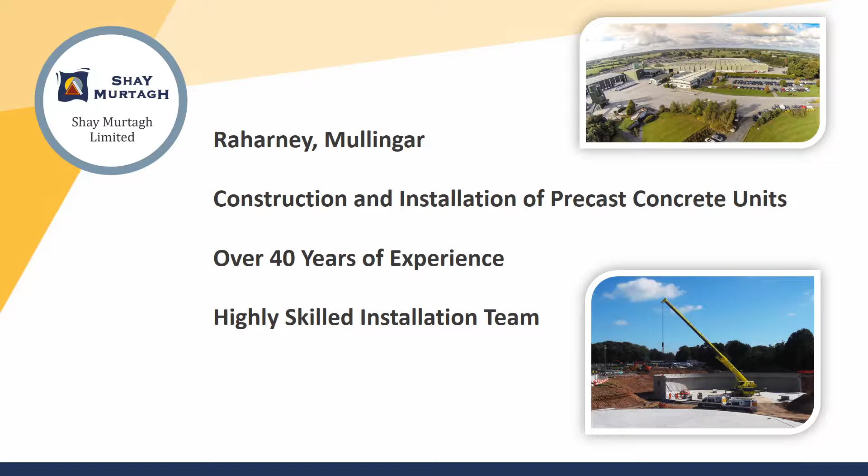These are projects we're involved in at the moment. We're doing 60 houses out in Ongar. We're doing three 5-story apartment blocks up in Blanchardstown. We just did a hospital in Cambridge. What else are we doing? We're doing a school in Galway and a nursing home somewhere in Fingal as well.

It's the biggest factory of its size in Ireland, and there's one bigger in the UK that just does that type. It only does 150 thick panels, 200 thick panels, or twin wall. So if you have a house or an apartment block or something like that, it has to be one of those three products, or we can't do it. It took us a while to learn that, actually, because the lads were trying to sell 250 thick panels or 300 thick panels, but the system just can't do it.

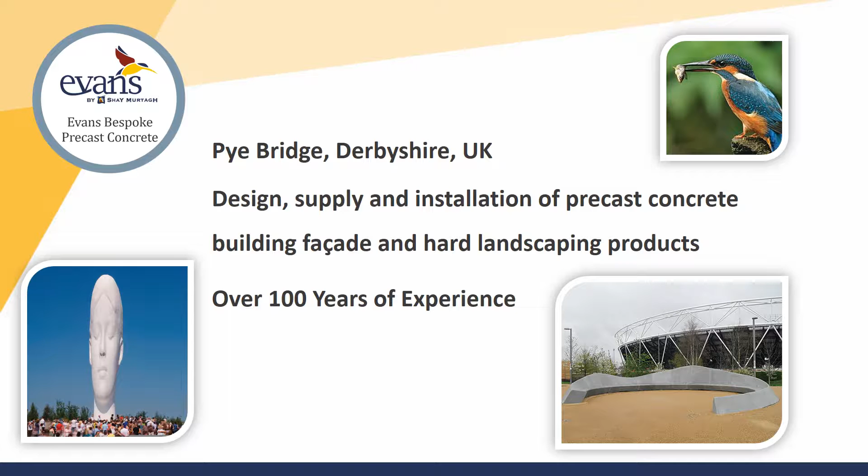Every company has a mission statement, and ours has always been a commitment to deliver infrastructure on time, and this has been key to our success over the years. How important a mission statement is - your clients measure you on it every day.

Again, vision - I wouldn't say we're visionary in anything, but I suppose we are customer focused, and we try to get everybody involved in the dialogue with the customer, and continuous business improvement, and then sort of CPD, trying to get our guys trained up and improve everybody in the organisation. We work a lot on culture.

I know in the old days the precast industry was like construction generally - maybe a bad reputation, a hard reputation. These days we work a lot on trying to develop a culture where everybody feels like it's somewhere they're delighted to go to work. We do this through a load of different ways of supporting local organisations, dinners out, social events, all that sort of thing. It's not like Google, but it's trying to be a bit like Google. We work a lot on our values, so there's no more screaming or anything like that we used to see on construction sites years ago.

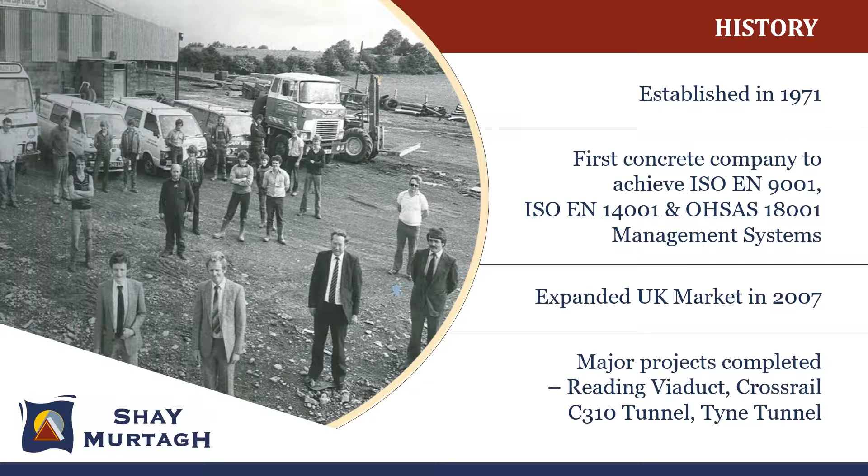What I didn't realise at the time was nobody else could do it, and nobody else would have been in front of the truck trying to make sure it was going to be there on a Sunday morning.

The rest of the products - people in the industry know Shay Murtagh for bridge beams, for culverts, for tanks. I suppose they don't know us for twin wall, residential, or commercial.

We also have a reinforced soil business, which is Hexlock and Gridlock, and then sort of hard landscape and public art. Shay Murtagh is not really a name that's synonymous with public art in the past, but we can do that these days.

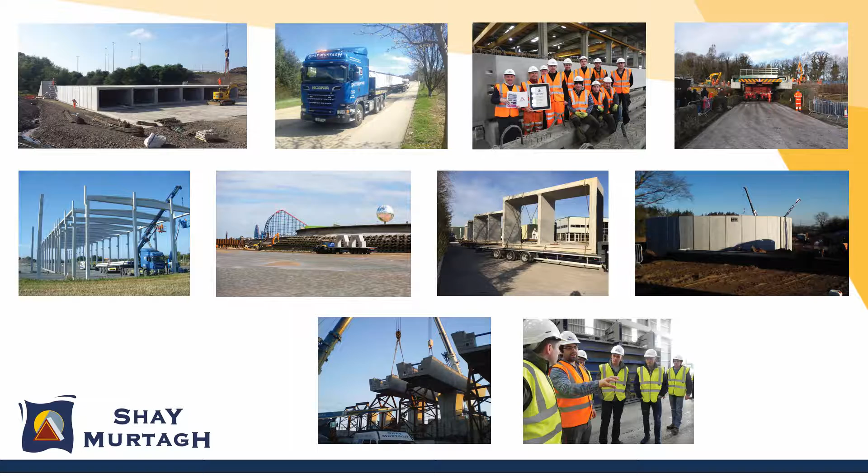In the market, I suppose, from 2007 onwards, the precast market just crashed here, so we found ourselves having to depend more on the UK. Today, about 82% of our production, of our sales, is in sterling, and I have a list of clients there, our major clients.

Though everything we make is bespoke, you tend to find it's the same people sort of reordering all the time. So if you have a relationship with a particular guy in Bam Nuttall in 2008, well, it turns out he's probably running a whole scheme of projects these days. Same with any of the clients really - those guys move up very quickly in the UK through the ranks, so they become key customers these days.

Just in terms of capabilities - we talked about design, obviously manufacturing, the factories, logistics and installation, and that's the whole process for precast. For whatever precast you need, you have to get the precaster involved in design, and he has to make it, but nobody buys precast ex works, so you have to do the logistics. The precaster has to do the logistics and often has to do the installation.

Just on design - I think 75% of our stuff is drawn now in 3D in Tekla. We use Tekla, we tried Revit, we didn't find that very comfortable or compatible with what we were doing. Our clients now send in an IFC file, we'll change it into our model, we try and convince them to use a Tekla model, but if they don't, we transfer it back.

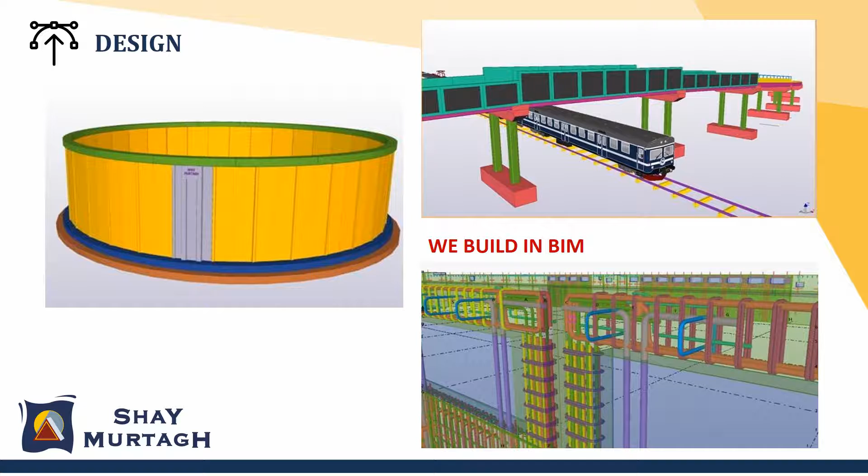This whole 3D design has made life so much easier for the guys in the factory, for the guys in installation, and obviously for the design itself, when we can see the clashes and the issues, and just pick slimmer sections or a new idea. We'd often just throw a model up on the wall and decide to take it apart to see what we can do to make it lighter because of the piling or something like that. And often the type of precast you choose will affect lots of things around the whole project, not just the precast itself.

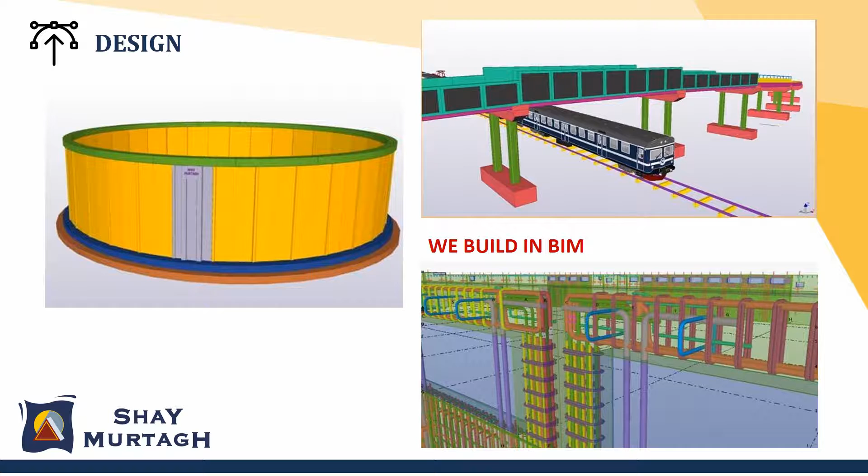All sorts of beams - the heaviest piece we've ever made is 200 tons, and we go back to small stuff, 1 ton. We do all types of U-beams and bridge beams, but what people again don't know us for is last year we did 15 steel bridges, because often steel bridges have as much concrete as a concrete bridge, would you believe?

That's where we need a particularly thin section, where the client for some reason cannot accept a deeper section. So we have to go with a steel composite deck, which often happens when you're doing retrofit or replacement bridges - you have to look at whatever solution you can use as engineers.

For the solution - in terms of bridge replacements, last year we did 67 bridge replacements on Network Rail in the UK, and about 12 for Irish Rail. So it's quite a good part of the business - every week and a half we've got 2 bridges going out. Each one of those is really challenging and interesting from a manufacturing point of view, a design point of view, and then the whole logistics side too.

Christmas Day is the busiest day of the year for the logistics team, but like 2 weeks before is the busiest for the factories, because in the UK the rail lines close down at Christmas. So the busiest we've had is 12 bridges on Christmas Day - that's 172 trailers moving on Christmas Day. It was mental.

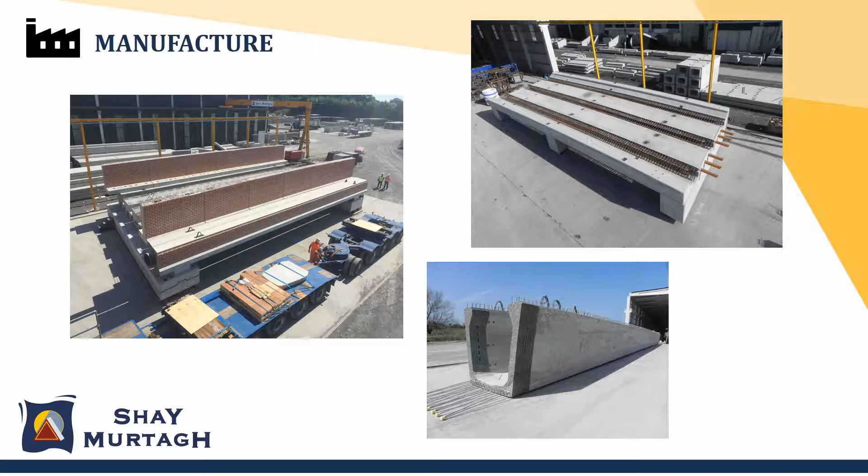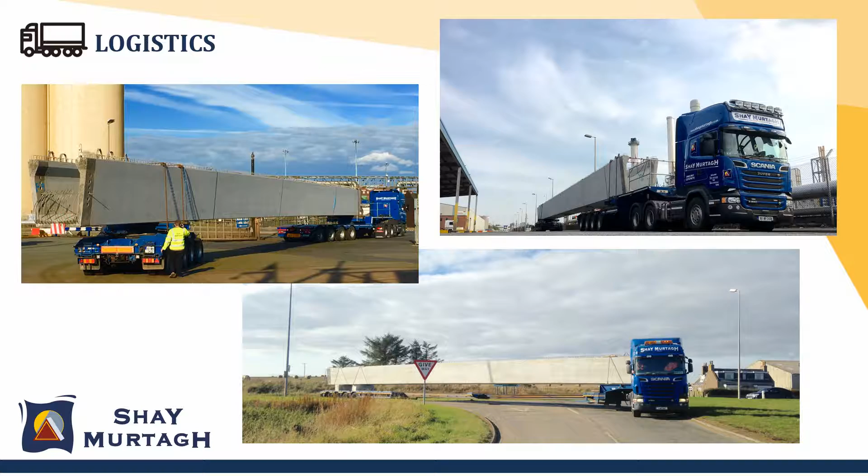So that brings us on to logistics. We've about 120 odd trailers, everything from standard 40-foot trailers right through to the modular stuff that you would only see on the road at night. Things like this - a 45-metre long beam, W19, going up the M6.

In the UK we go up during the day, but in Ireland they have to travel at night. So if you're on the M4 at night, you'll see a load of Shay trucks crawling up the road pretty slow. We deliver - that one's going to the Mersey Gateway bridge.

There's 256 beams on the Mersey Gateway, and they're all longer than 38 metres. So it's a real logistical challenge as well as the manufacture.

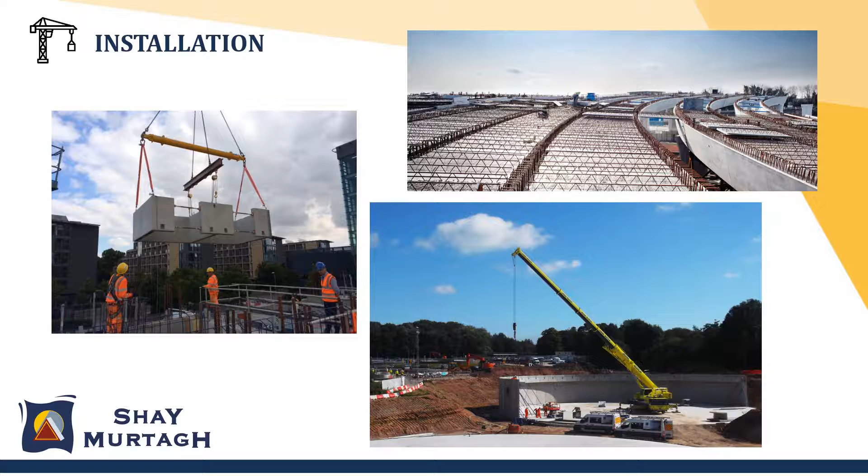The next bit was just on installation, and what you see here on the left-hand side is a stair core and a lift shaft. We do precast stair cores and lift shafts, and they go in all over the UK.

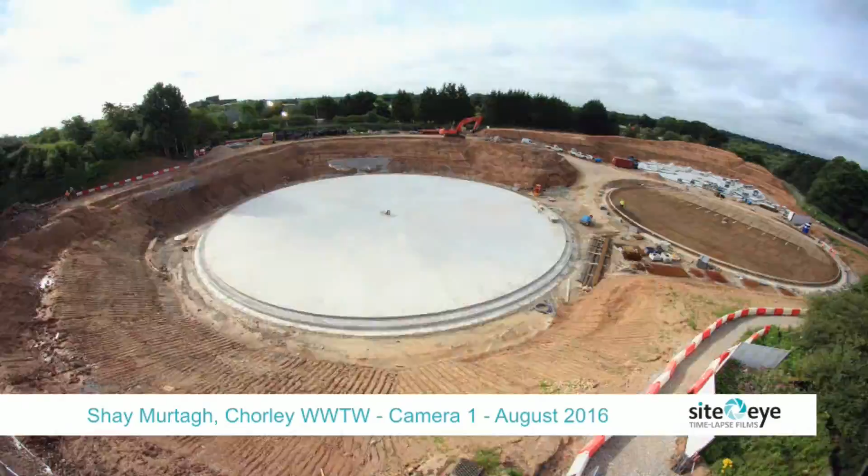I suppose what the installation team's working a lot on is the concrete tanks. Concrete tanks are precast post-tensioned tanks. I actually did my thesis on it - it's in the library still, I must look it up to see if it's still there.

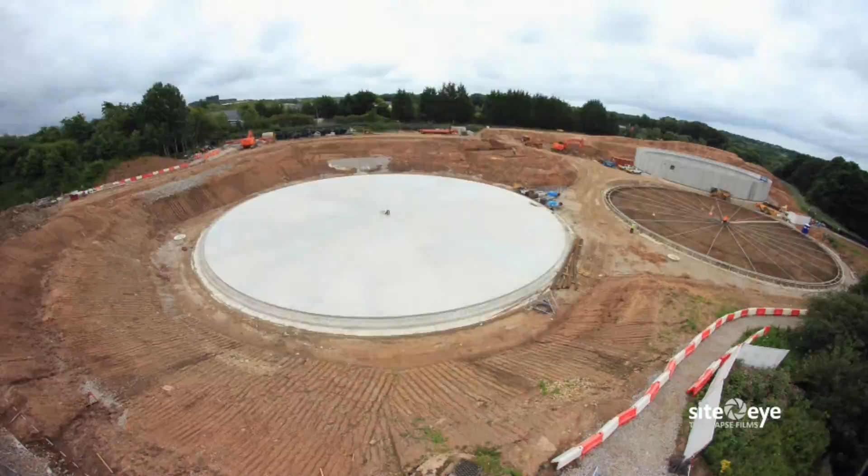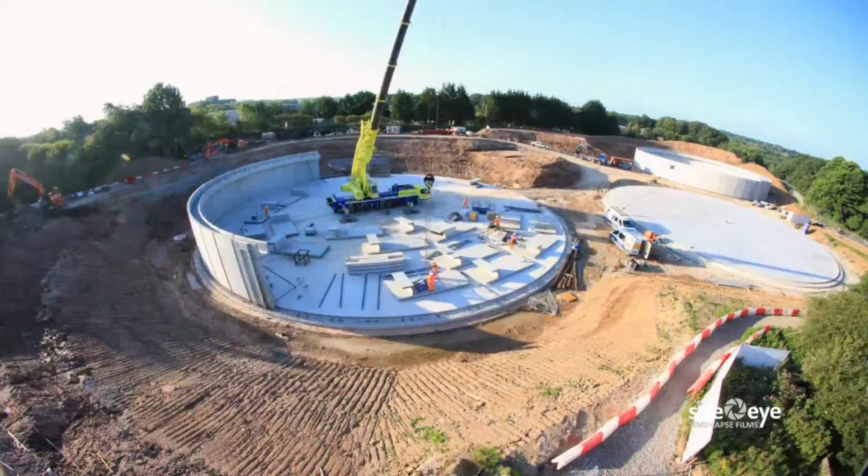We've been doing precast post-tension tanks in Ireland for 40 years, but they're really only catching on in the UK lately. In the UK there were a lot of issues around post-tension back in the 70s, so it hasn't been that popular - it's taken quite a while to get them to understand the system and what we do.

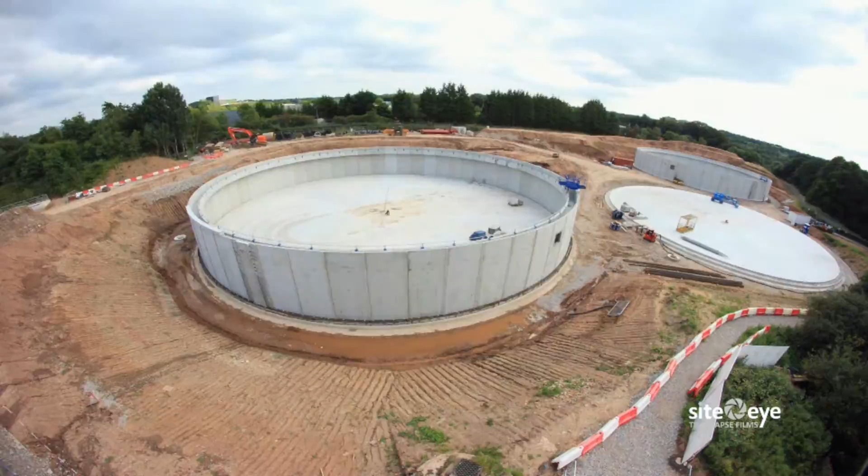The tank panels are much bigger these days than they were back in the 70s. Now they're put up by big cranes, and they can be erected in 2 or 3 days. Typically a team of - on this project - there's 5 guys working on site, and they have 3 tanks up in 3 weeks, and the client is wondering why he hasn't used this his whole life. So I think it's just another part of what we do.

There's a little bit, in the post-tensioning - I wouldn't say black box technology, but there's a bit of thinking around the post-tension design in those circular tanks. Steve knows a good bit about it, but we're also doing some rectangular post-tension tanks at the moment, and they're really interesting as well. We've been talking about this for about 10 years, so we finally have the first ones going up now.

In terms of operations, when you're running at the sort of production levels we do, supply chain is really important. You'll obviously have your concrete and steel, but all the accessories, connections, everything required - you need to have your supply chain on hand. So we work a lot with our suppliers to make sure everything's available.

We've huge stocks of things like lifters and so on. We have an ERP system - enterprise resource planning - that tells you exactly what's going on. Really important in a multi-factory environment where you're trying to coordinate pieces from each factory, and design, and when design's going to come through. We call it Jarvis, and we're continually updating it.

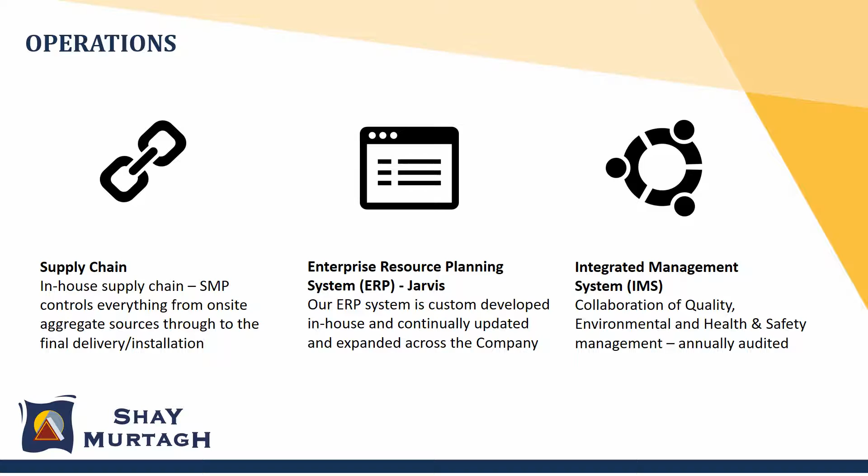Quality, environmental and health and safety. For CE marking, we're fully compliant. There's a list of 9 categories where concrete products have to be CE marked these days. So every manufacturer has to be able to do the CE mark, and it's quite stringent testing in place, and compliance with them is quite onerous.

In terms of training and health and safety, we currently have an apprenticeship program running at Loan Training Centre, where we have 14 guys being trained to be precasters at the moment. It's a bit of an unusual step, but we need people with certain skills, and they're probably not coming in off the street anymore. So we've a 7-month program at Loan Training Centre. This is the first year of it, and it's a way of trying to encourage people to come in and look for jobs, then train them up to work for ourselves, or they could get work with any precast factory, I suppose.

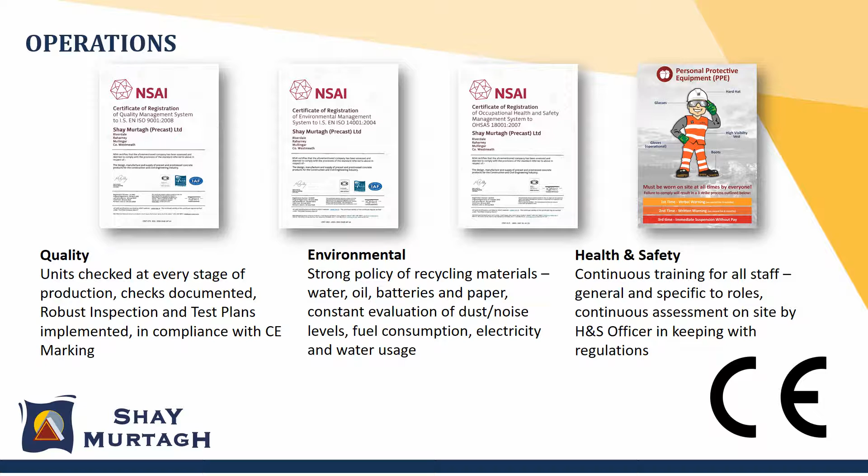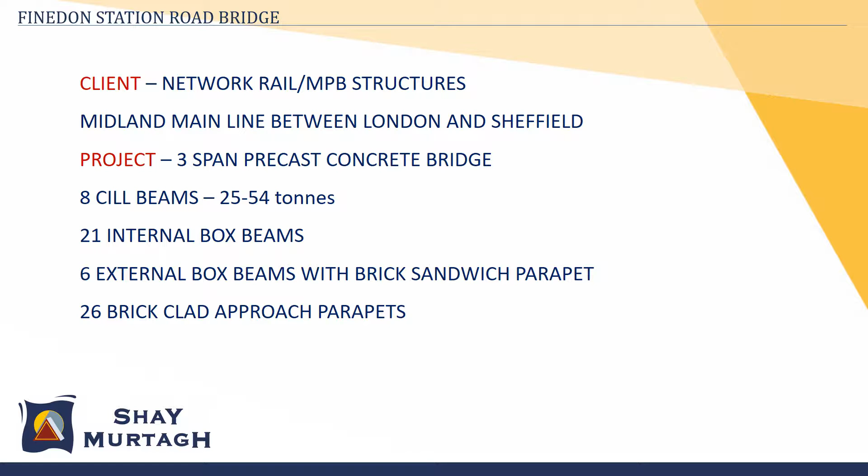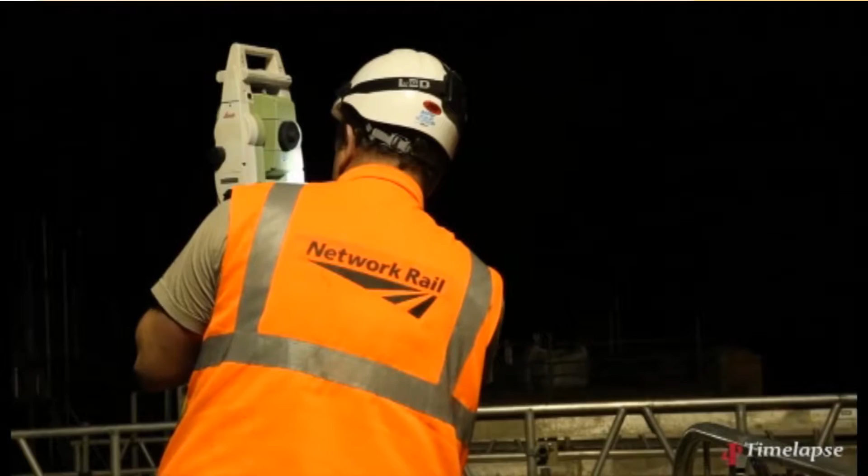So some of the projects that we do then, as I said to you, Network Rail are a key client, and this one here is typical of what we do. Sorry about the music. It's box beams sitting on top of cill beams.

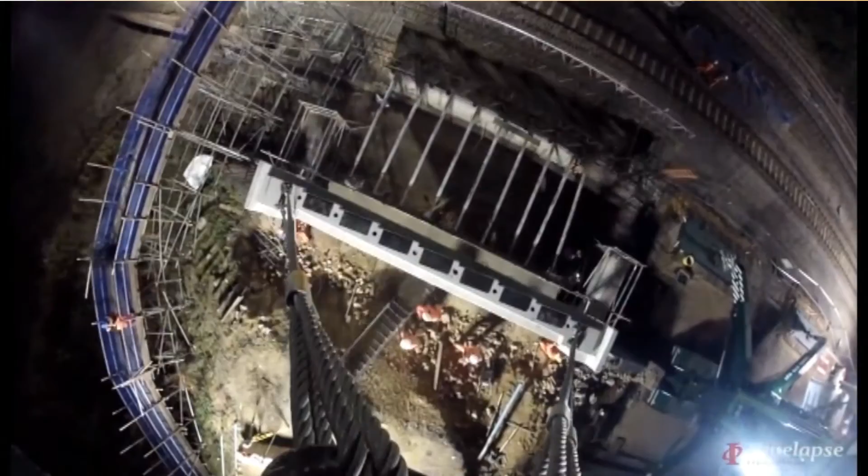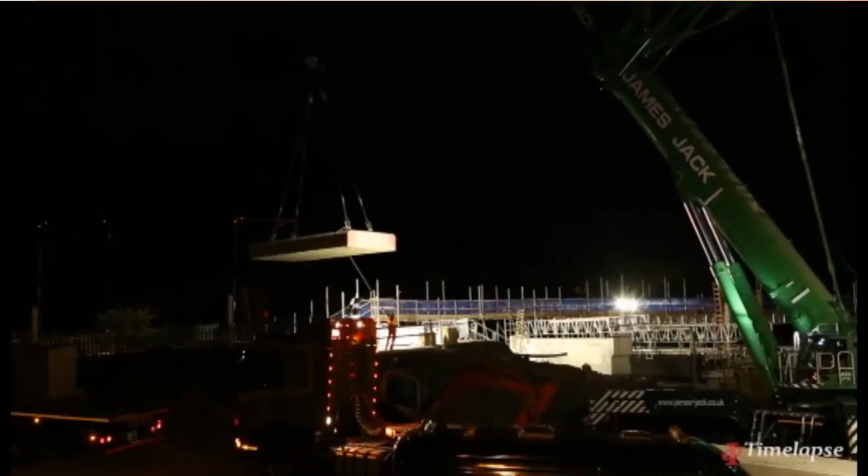So the bridge had been demolished the previous week, and there's a 72-hour possession to install the new bridge. So what happens is the drawings arrive in with us, and we start manufacturing it. We assemble the whole thing in the factory. Once it's complete, the client comes over to take a look, and once they sign off and everything, it's all loaded onto trucks and goes to site to be installed.

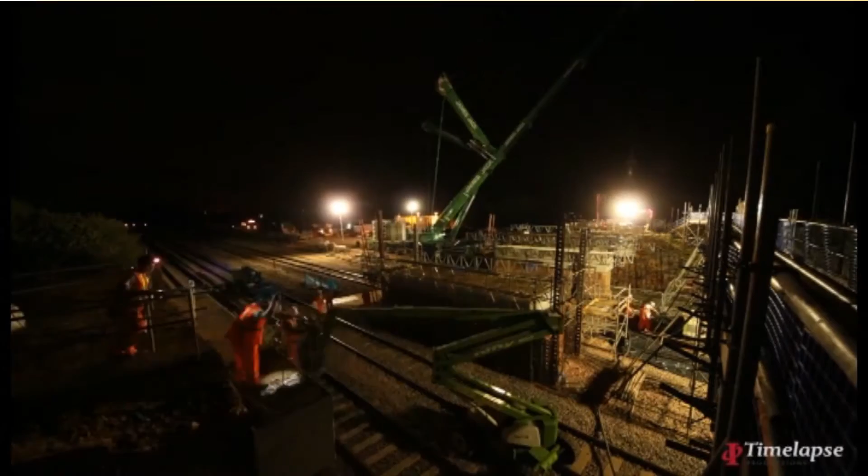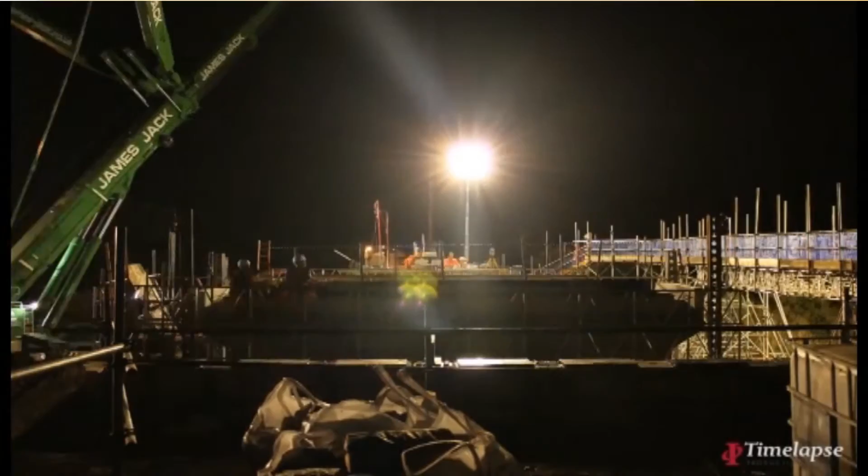So although the guys are putting it together here, they know that it already fits. All they have to do is make sure they put the first piece in the right place, which sometimes they don't, but we don't actually get too many calls, and our guys usually don't have to go to site. We take a video of the whole lot going together, give them the timings, and tell them how long it's going to take.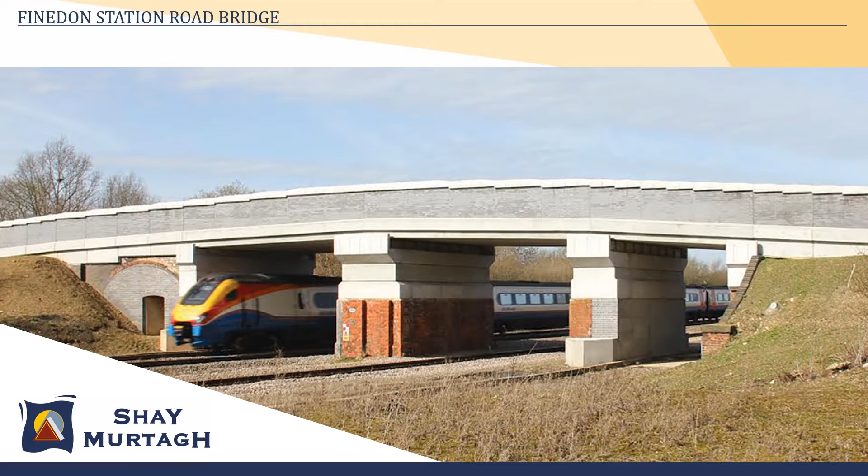And another project that just got some local awards from the local council and stuff. Probably doesn't look too bad.

The next project is the Crossrail tunnel. Crossrail was the biggest project in Europe for a couple of years there. So we got the contract to manufacture the tunnel segments for what we would say is the most difficult part of the project. It was a bit underneath the Thames, and definitely the most challenging from a geological point of view.

27,280 pieces, and very, very challenging. 36% GGBS in the mix, 30 kgs of steel fibres, there's no conventional rebar, just 30 kgs of steel fibres. The tolerance on each piece was 0.5 millimetre. So I'll give you an example of how that affects you. When we came back after Christmas, the place was cold and the heating hadn't been on, so the moulds were out of spec. So we had to wait 3 days to heat up the moulds to get them back into spec so we could start casting.

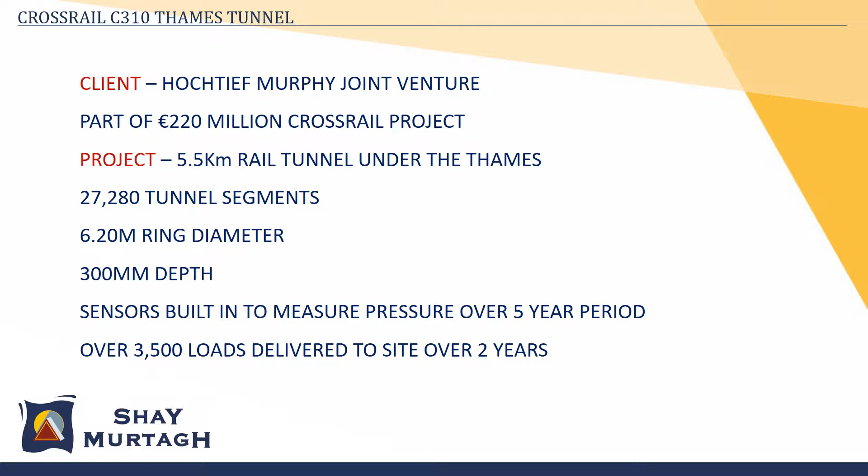Definitely a very, very challenging project. The project went faster than normal. Usually tunnel projects have huge delays. This one actually went faster, so we had to double cast. So now we've got a very onerous client with 36% GGBS, no conventional reinforcement, and we need to cast twice a day to try and make the program. And we actually did it, which shocked most of us.

Yeah, so it's a very, very interesting project. You could talk about it for 2 hours on its own without anything else. Just the testing, the fire test on the concrete, was the first time it had ever been used, 1100 degrees for 45 minutes, just to make sure it's not going to fail. As I say, you could do a PhD on the tunnel itself.

Structure 17 on the M50 is the one with the curvy bridge, right? There's 38 curved beams, post-tensioned. Again, just in Ireland with the post-tensioning situation, it was the first time in quite a while that post-tensioning had been used in this type of structure.

So we had some pretty rigorous requirements from the client around proving that the grouting was up to spec. Of course, the grouting technology has moved on so much in the 20 years since the last one was done.

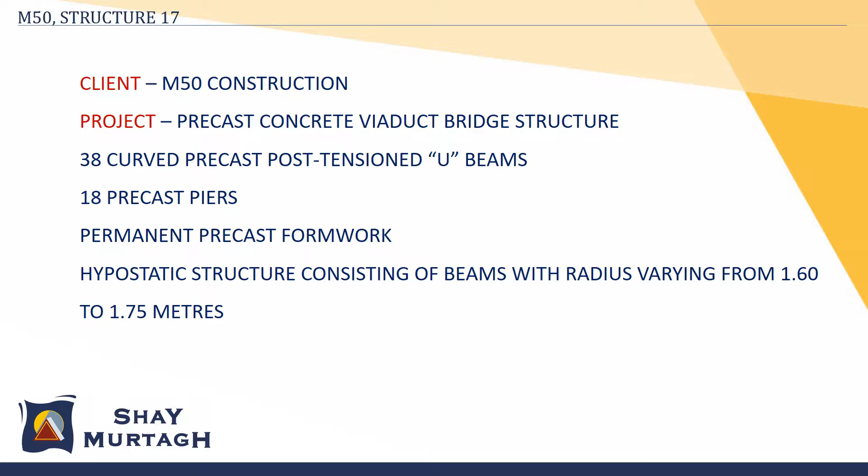And of course, when the installation sequence came out, everybody was like, oh no, because we had that last beam that had to fit in between everything else. You were hoping it was going to fit, but it actually did, and it looks quite well anyway. We've won a couple of awards on this, and High Speed 2 will be using this project for this type of design for some of the projects in the UK.

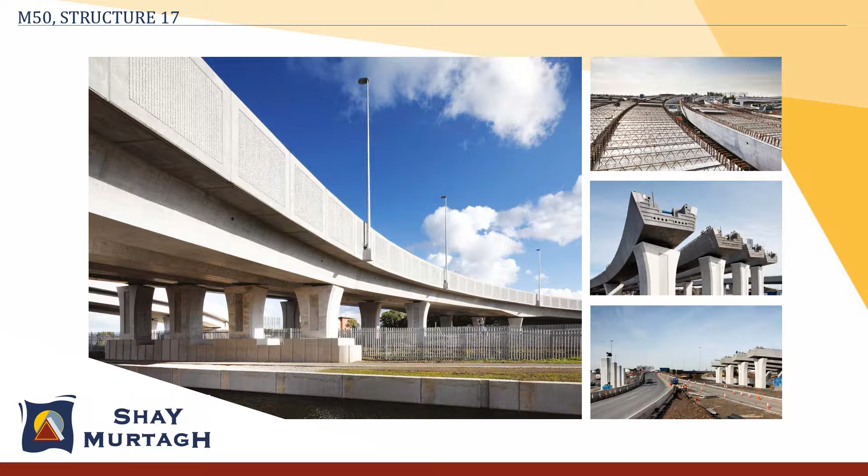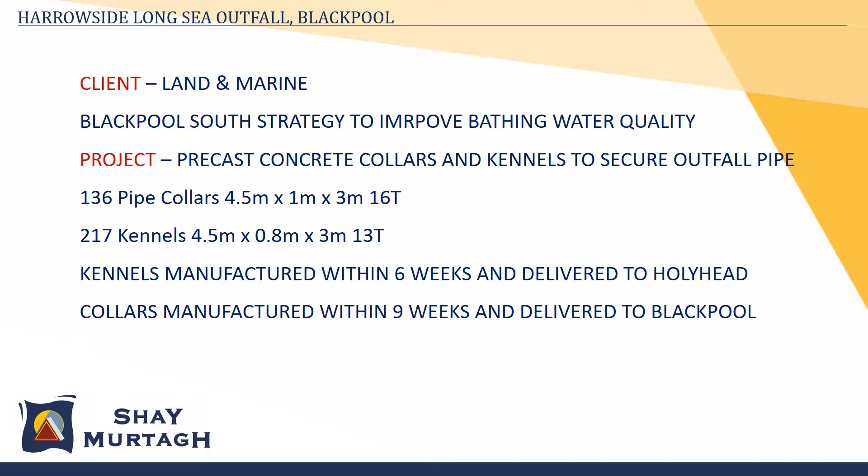Interesting way they're doing it: they put together the pipe in Holyhead, sealed it up, put on some collars, some weights on top, brought it over to Blackpool, and then basically burst the pipe, let it fall, sink down, and then put the rest of the collars on. So for us it's a huge amount of these weights, and we have another one at the moment with, I think, 1,200 pieces that are 27 tons each, just pipe weights.

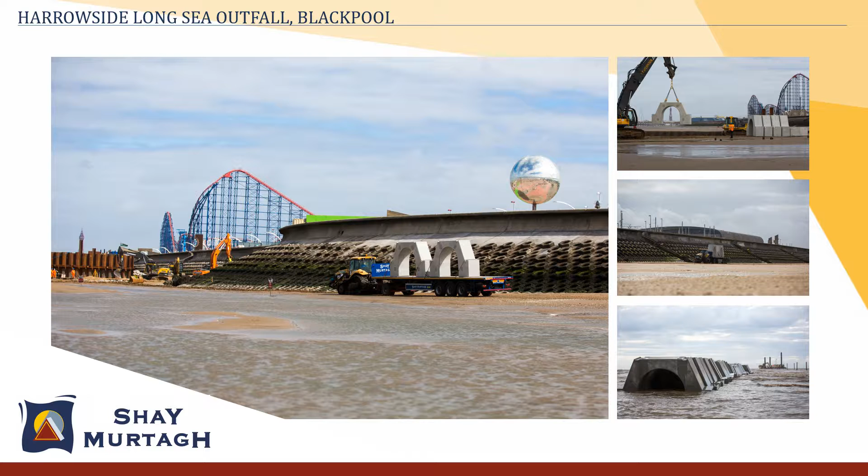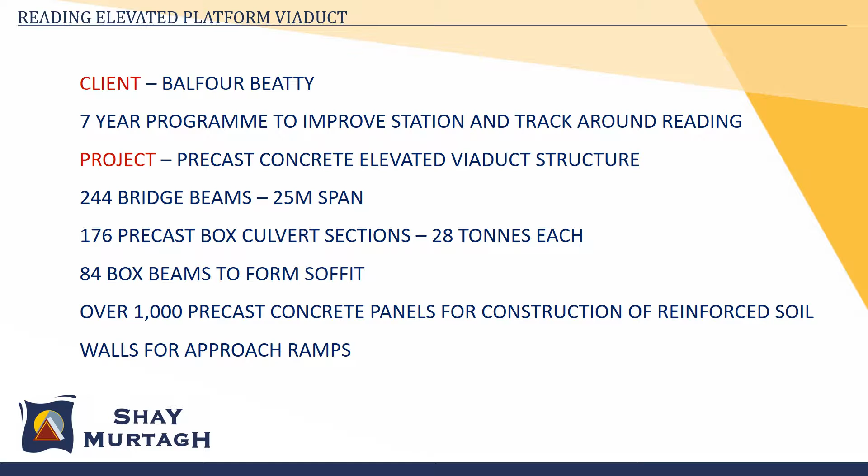Amazing, just the scale of the projects that they do. Reading, Kieran spoke about Reading Viaduct. The Reading Area Improvement project was a massive one for us, but we got the Concrete Society Award in the UK for it because of the scale of the project.

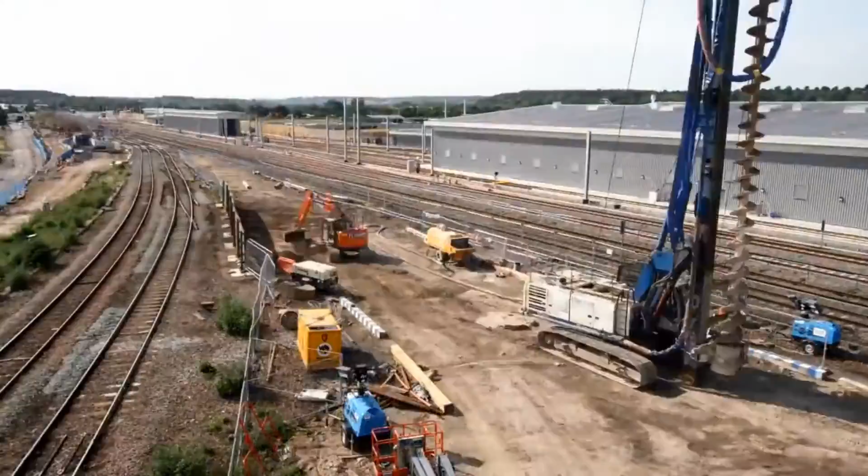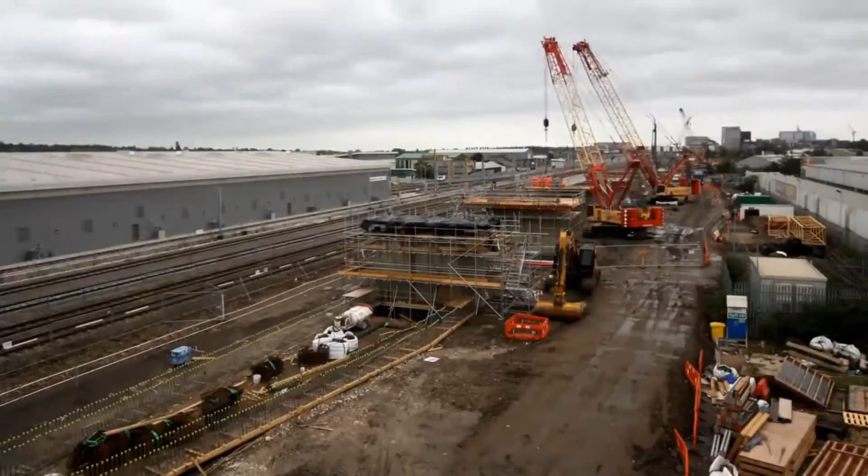There were 25 spans, 25 metres long each. Altogether there were over 500 bridge beams brought in right into the middle of Reading, and 178 culverts, 28 tonnes each, on the project. They're trying to build this viaduct in between two rail lines, with all the complications with the jibs of the cranes and everything.

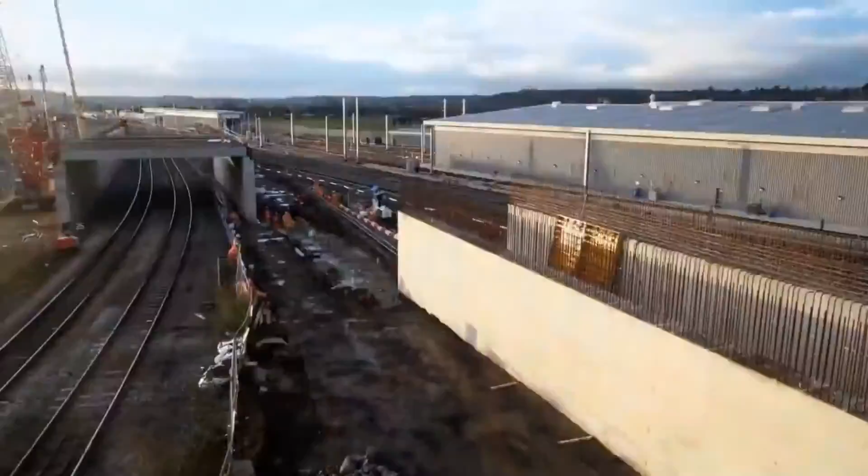The police told us that they want all the deliveries in hours of daylight. So the first day we went in with 5 trucks, 25 metres long, and they said no more deliveries during the day, they want them at night now. But that's just typical of what they try to do in the UK construction sector. No matter how complicated it is, they seem to put their mind to it and try to deliver it.

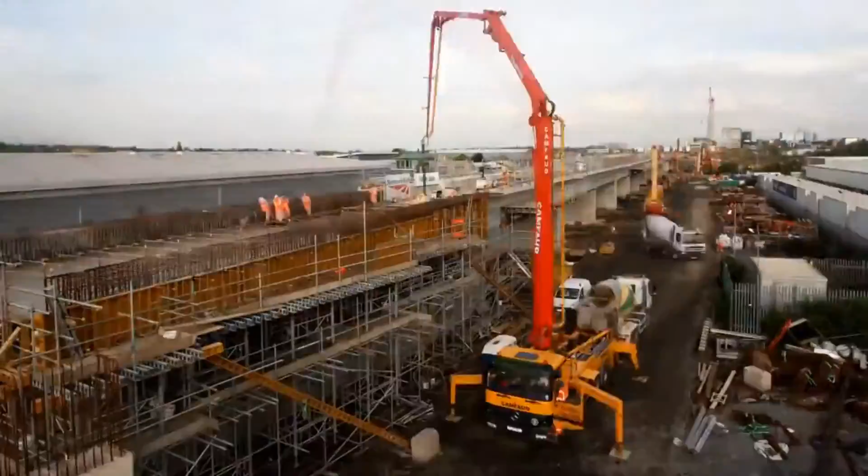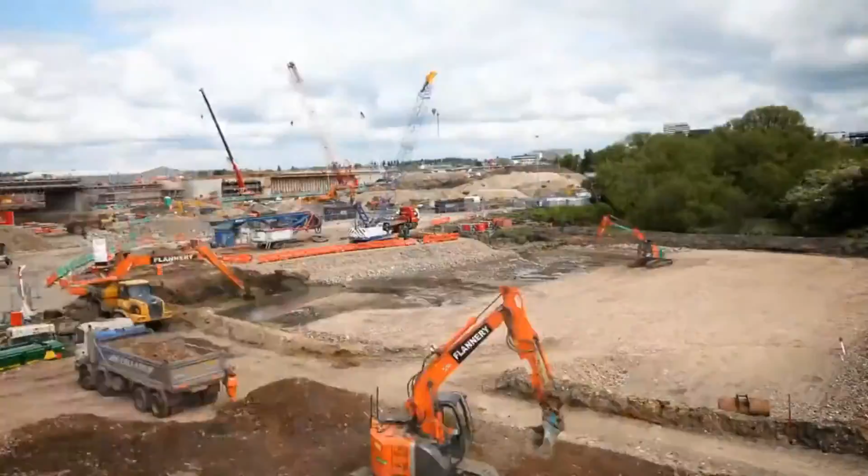There's a great shot here of the installation of the culverts, where they've got a 1,200-ton crawler crane. I hadn't even seen something like it before, and they're just putting in a couple of culverts every day. It's just slightly different thinking than the way we would probably do it ourselves.

This construction site is right in the middle of Reading, on the Great Western Rail line, from London to Cardiff to Bristol, so it's really busy with train traffic.

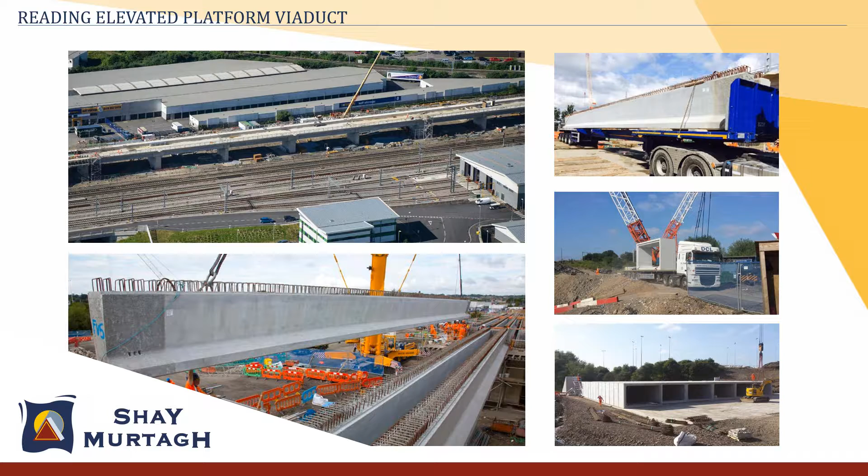Today, if you go to Reading, it looks really well. It does look new, it doesn't look old. I'm not sure why this one is in here, but anyway, the little outfall - I think the lady in marketing who did this liked the project or something.

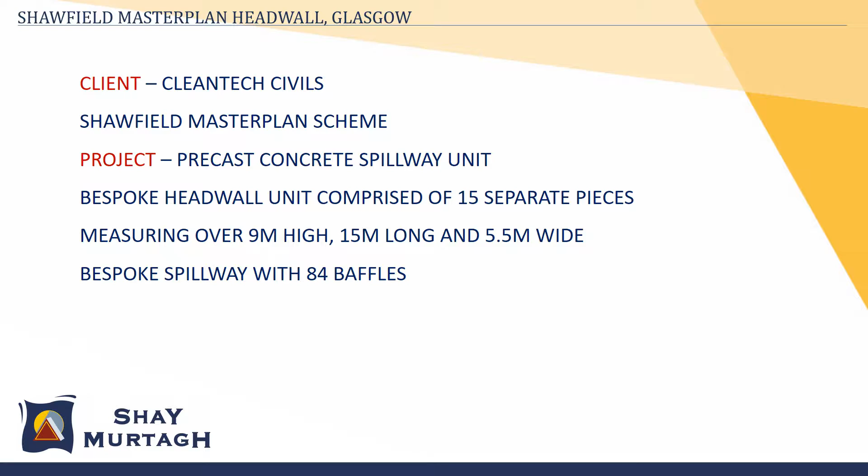Again, up in Glasgow, the people of Glasgow thought this was a great job for the Environment Agency up there, but the rest of us are going, it was a nightmare. More of this sort of architectural concrete, I suppose.

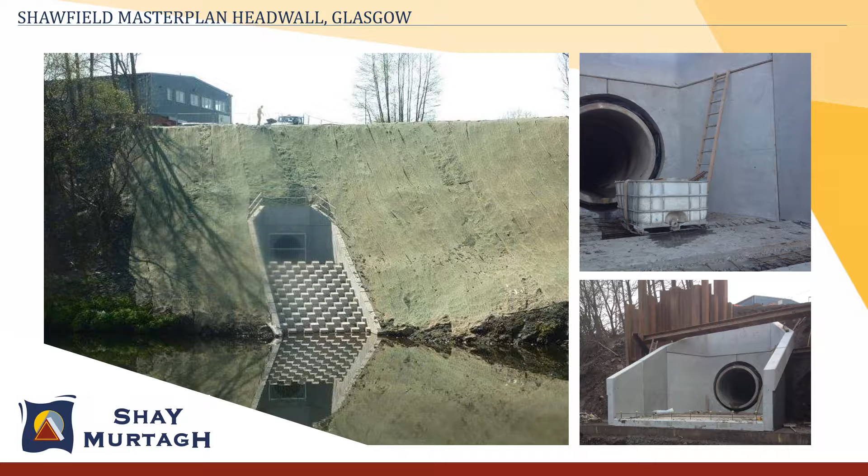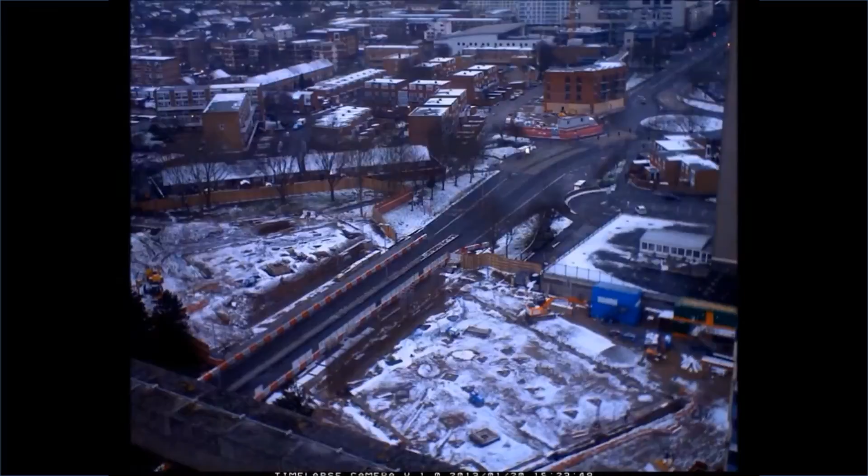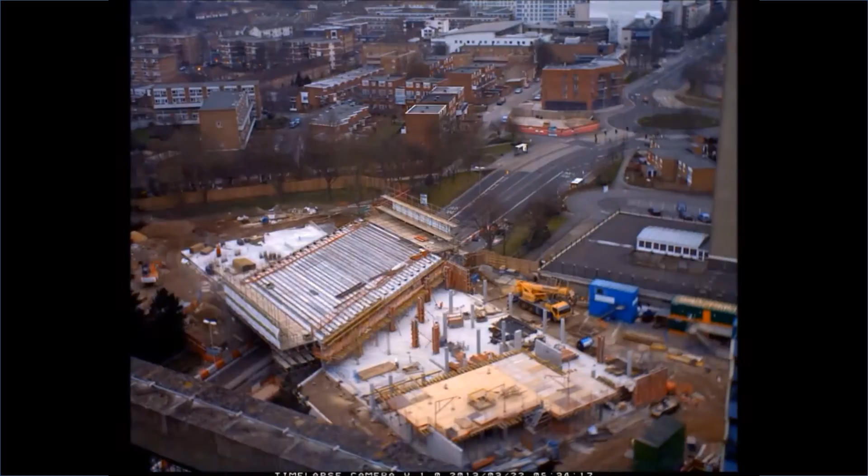Essentially what happened was there were two tower blocks, blocks of flats, that were divided by a dual carriageway back in the 60s, and in the 70s the place got a bit run down, and they started to shoot at each other from one block to the other. So to try and rejoin the community, they decided to build a bridge and then put this community centre over it.

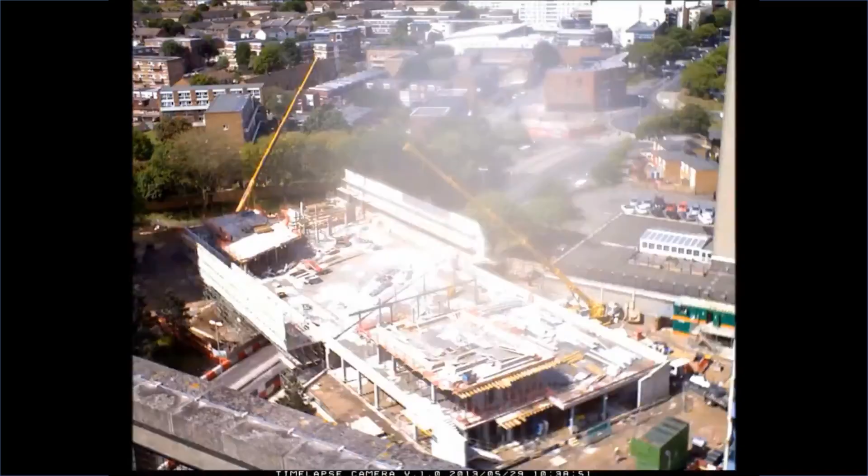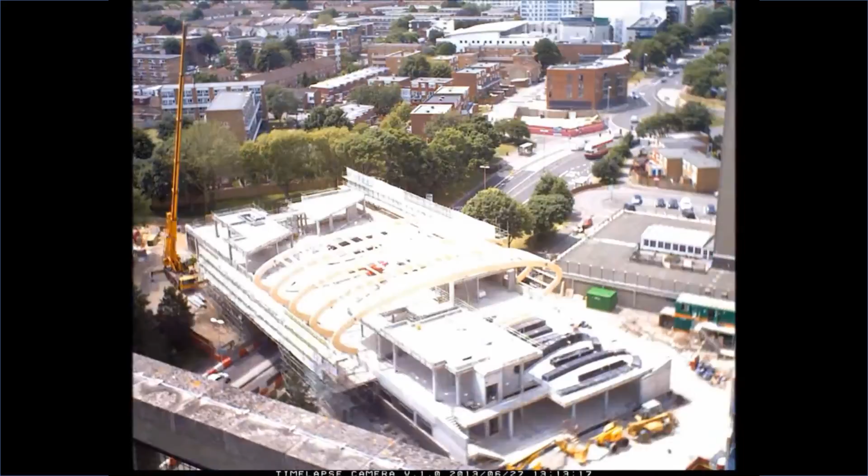I think we all regretted taking that phone call from the architect that day, because it turned into one of these massive projects. But we were invited back, thanked for all our help, and they keep talking about us as if we helped link the community and stop the hatred from one tower block to another. But I think you'll agree the project looks really well. I think it was U3s, wasn't it, with a two-span bridge, down in Portsmouth.

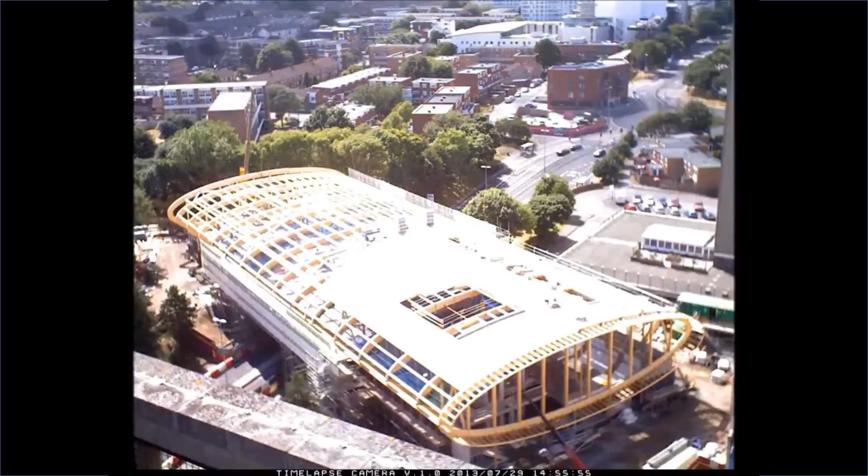Just a little bit about the future. I mean, you talked a lot about Shay and some of the projects we're doing, but as I said, the precast industry maybe had a bad reputation in the past, and we need to get ourselves a bit more like Google, or maybe one of the medical device companies. So we need to work on our reporting systems, on our quality, and just make it a bit more like those sort of industries.

So I talked a bit about Jarvis, our ERP system, but the lads are working now on giving clients access. So if you're an architect or an engineer, a structural engineer on a project, you'll be able to log on and see exactly where your project is in the system, using the BIM models, the technical model, and make changes live, rather than having these drop-dead days where everything is done on a certain day. Everything should be much more live, and if there are issues with costs or efficiencies to be gained, you should be able to make those changes.

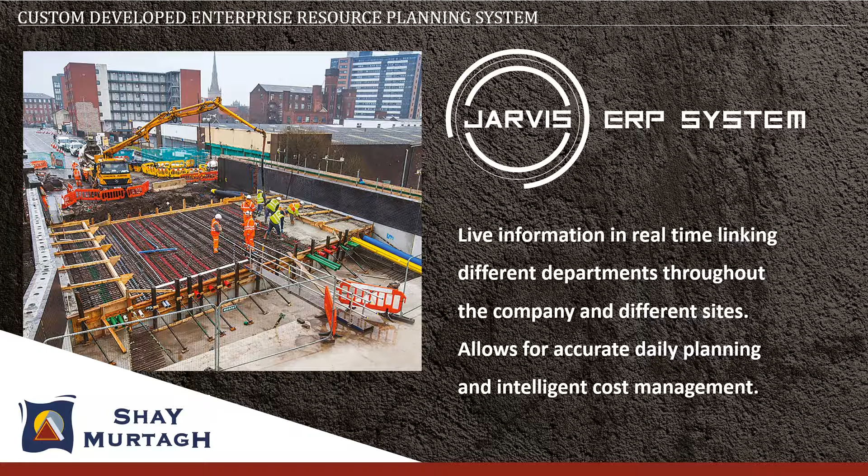Obviously we're working, and everybody in the precast industry is trying to work more towards BIM. 3D modeling - we've all seen huge advances in it, huge advantages. The difficulty is getting trained people coming from the colleges, so that they're up to some sort of level on it. I know the colleges are working on that at the moment, but it's just an issue around people.

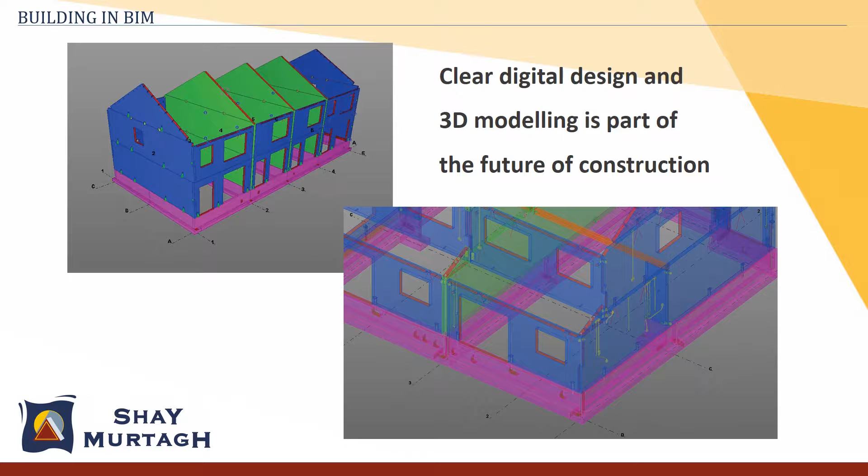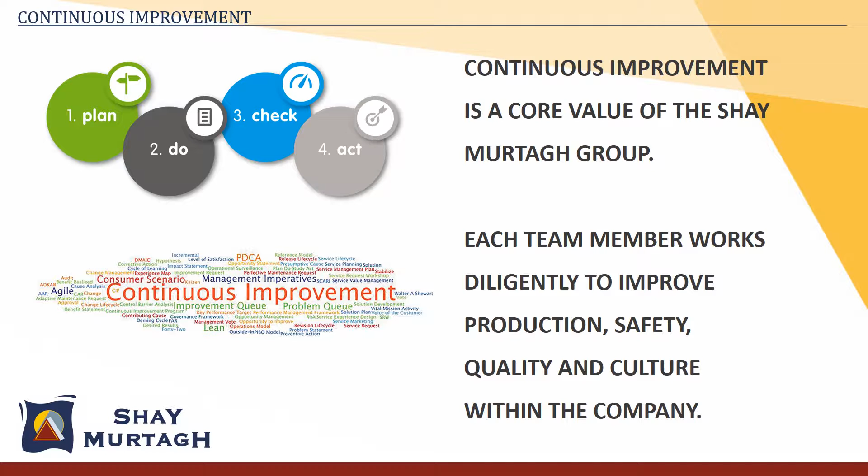Yeah, I suppose it's our company's goal to keep working with the colleges, working with the training centres to try and get those sort of people we want, coming in with the sort of teamwork ideas that we have ourselves.

We're working on a Tekla warehouse. I'm not sure exactly what a Tekla warehouse is, but it's online apparently, and we have an awful lot of information. So as designers you'll be out there looking for information, and we're trying to give it to you, make it as easy as possible. Every project we've done - thousands and thousands of projects, different levels and complexity - should be available to you guys, so you don't have to reinvent the wheel as you're in industry.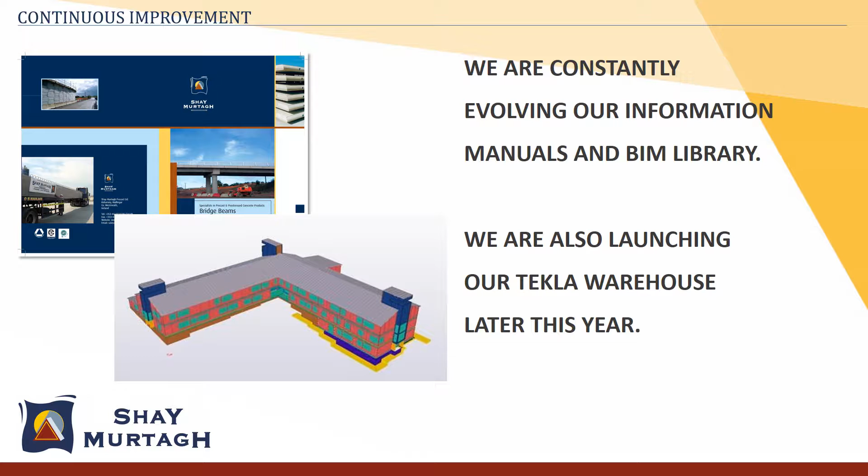So with regard to culture, we found that the guys in the factory didn't really know what was going on at the site. So we have an internal Facebook site that everybody uploads what's going on at site to. Every day you get updates, and the guys in the factories really appreciate seeing what their final products look like. It's really important from an engagement perspective, because even I don't get to each site anymore.

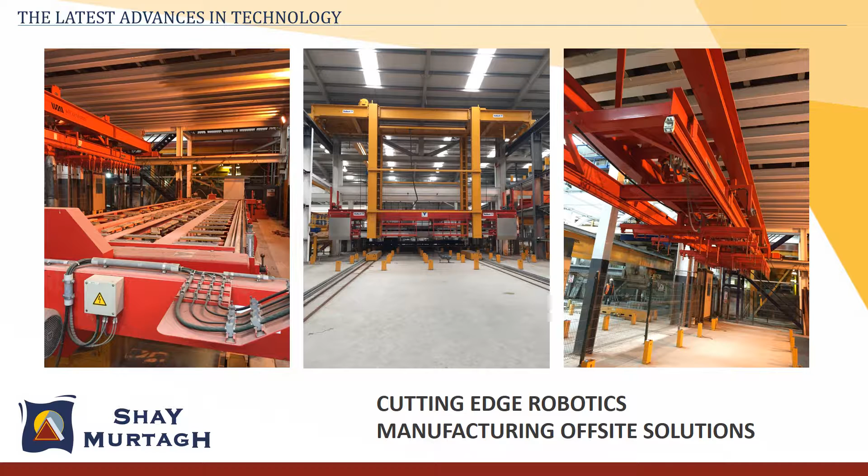The Allcrete is, as I said, an automated factory, but we're working a lot on trying to figure out how we can use robotics in bespoke concrete. We've got our first robot finally going into Raharney in 4 weeks' time. There's a lot we can work on to use robots and newer technologies in the manufacturing process to make it more economical, easier for the guys on site, and hopefully improve quality.

I suppose the trouble with that is there's nobody else doing it, so you have to kind of figure it out yourself. You can't just go and buy something.

So I just wanted to talk a little bit about some of the projects going forward. The first one is High-Speed 2. I don't know if everybody's aware of it, but High-Speed 2 is a £52 billion project in the UK - the new rail line between London and Birmingham, going up to Manchester, Sheffield, and Leeds. Phase 1 is 140 miles of track, and that's all going ahead at the moment.

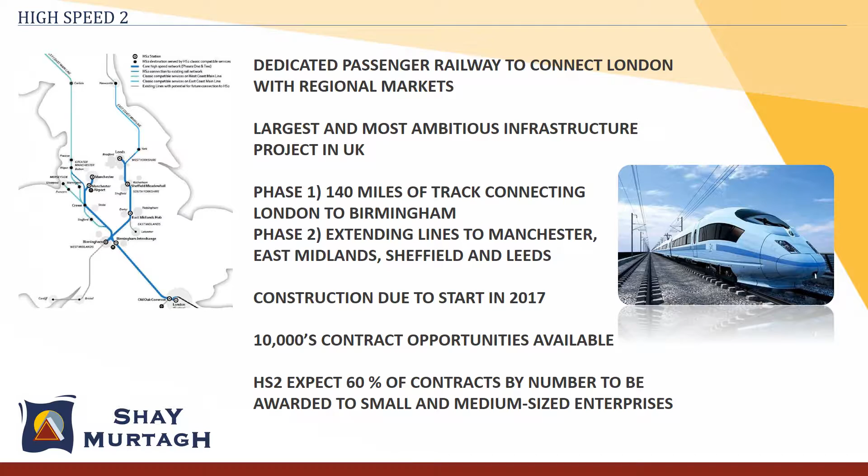The contractors are pricing different packages at the moment. I have some figures here for phase 1 - they've got 15.6 billion, that's actually gone up a bit now. A billion is nothing in terms of this project - it started out at 30 billion, now it's at 52. I can't keep up with it, they keep moving it up and down.

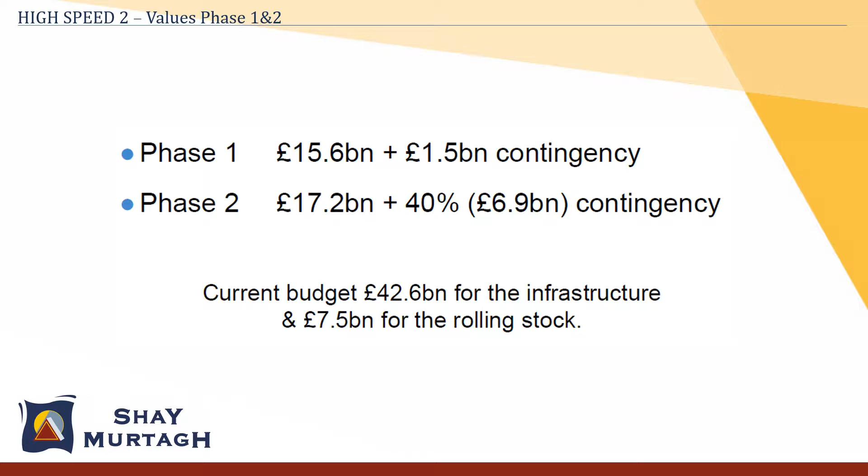Only 7.5 billion is spent on the rolling stock, so the rest is spent on the civils, electrical, and the land. This is how it's divided: 2.9 billion in tunnels, 2.7 billion in the surface route - that's bridges, viaducts - stations is 2.6 billion, 600 million enabling works, design services 350 million - massive packages.

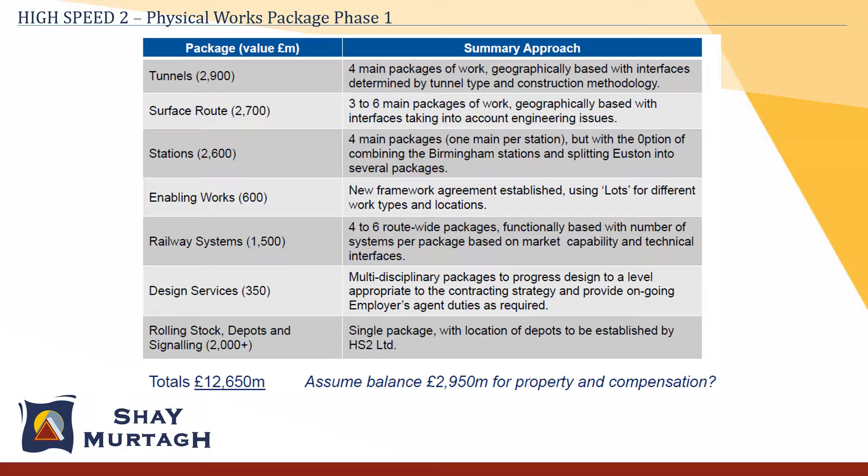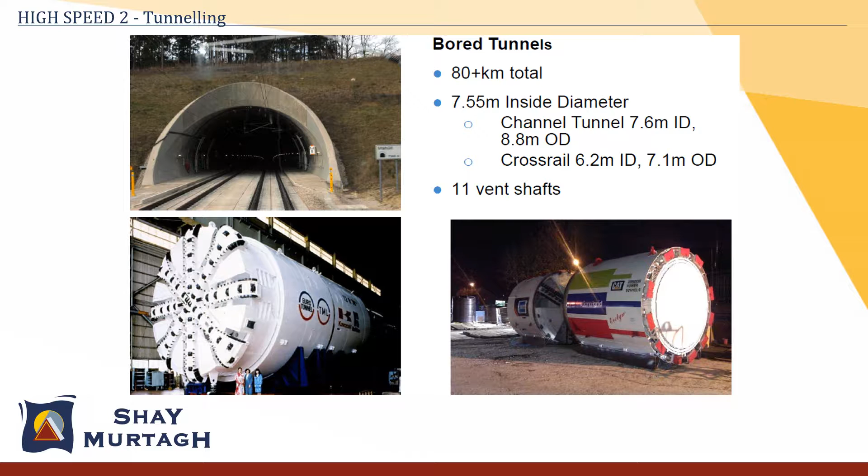The bored tunnel is 82 kilometres long, 7.55 metres internal diameter. I put it up there just to compare - the Channel Tunnel was 7.6, so it's about the same size as the Channel Tunnel. I'm not sure if everybody in the industry here understands the scale of the project - it's just massive. Even the 11 vent shafts would have been a great order a couple of years ago. A lot of this information is available online, and if it's not, I can send it.

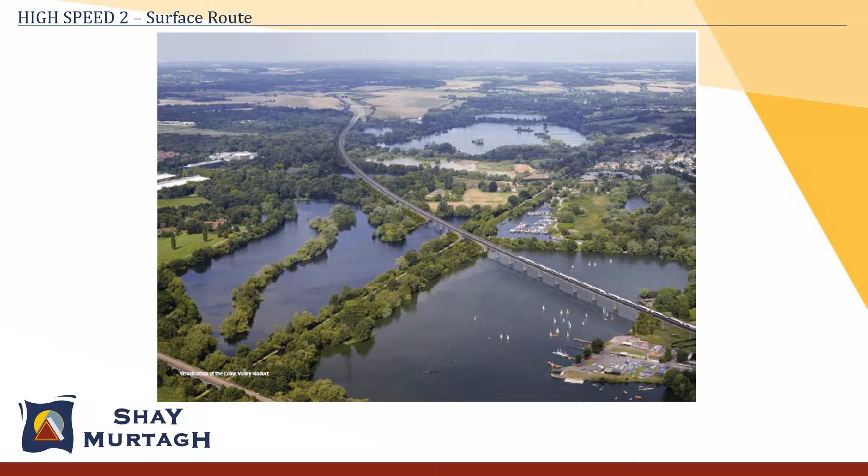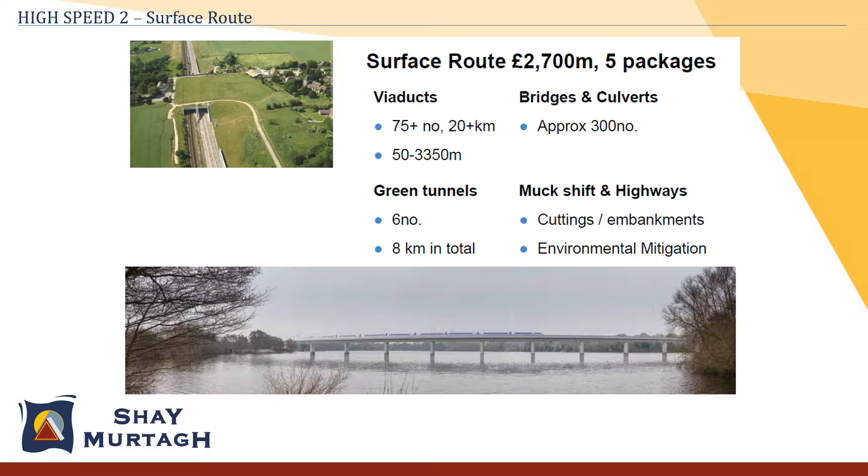In terms of viaducts, this is the Colne Valley Viaduct, 3.35 kilometres long. There's 75 viaducts totaling 20-something kilometres, so everything from 50 metres to 3.35 kilometres, and 300 culverts. The figures are just massive for it.

In terms of stations, there's only 4, but Euston Station gives you an idea of the scale - 1,200 houses have to be moved for its development. The whole thing is costing 2.6 billion for the 4 stations, with Euston being the biggest one.

So to give you an idea of where that project is at the moment, there are 9 groups tendering it currently. The tender award will be next August or September, and it'll be on site in 2018 - that won't be affected by Brexit or anything the Euro guys do. This is committed.

I had a meeting with the Secretary of Transport over there 2 weeks before Theresa May took over, and he assured me it was going ahead. He lost his job, so I had to go to the new guy, and he said it's okay. Two weeks later he's still in a job, so that's okay. But it's just a massive project.

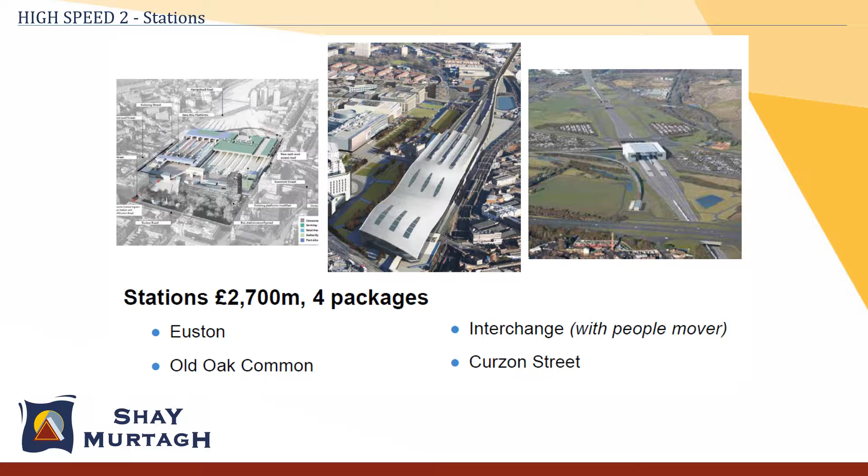But it's not the only massive project in the UK. That's why I think the future is so bright for Shay Murtagh, and not only Shay Murtagh but the whole precast industry. The fact is, if the whole precast industry in the UK and Ireland worked together for 2 years, we could probably deliver High Speed 2 - which is completely unheard of, that we would all work together, of course.

But the other thing is the project's going to be going over 5 years, so there's still plenty of capacity for everybody else, for all the other projects - until we look down through the list and see Hinkley Point, the nuclear power station down in Somerset, at 24 billion.

Massive. I have a whole other load of information on the scale of that. CP5 is Control Period 5, the Network Rail spending - that's 2.6 billion, and that's all that's left in this one. The next one is about 6 billion, starting in a year and a half or 2 years time - bridge replacements and electrification on the rail line.

Massive. Thames Tideway Tunnel, 4.2 billion. It's on site at the moment - 20 kilometres of tunnel underneath the River Thames. Massive project, a great one to be involved in at the moment.

The A14 is 1.5 billion - Cambridge to Huntington. Huge road project, so there's 23 structures on it. There's one 65 metre span, one really good one. But this just gives you an idea of the sort of projects that are ongoing in the UK.

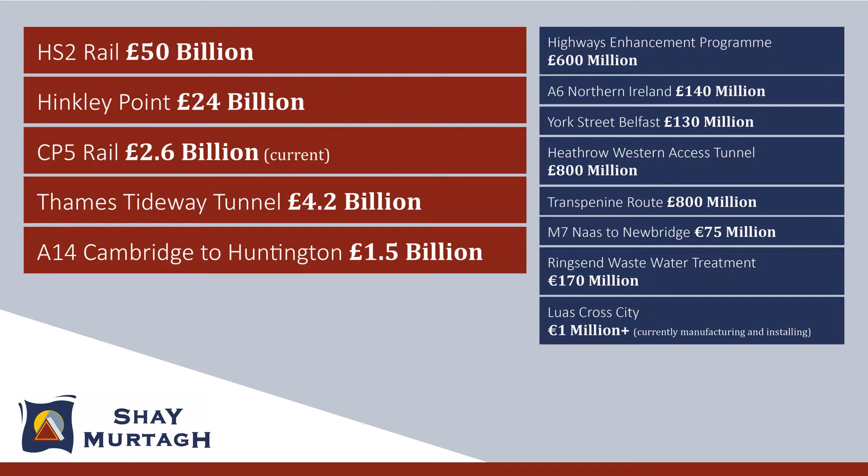I think mobile working is becoming much more like normal routine. So I don't know if anybody has any questions on any of that.

Thanks, Grant. I thought it was a fantastic lecture, and just the scale of operations and the organisation behind it is phenomenal. And it's real credit to Shay Murtagh how you've expanded into the UK and you're working on some of the leading infrastructure projects in the UK - some of the largest projects in the world, to be quite honest. Crossrail itself was one of the largest projects in the world for a long time. Is there any questions from the floor before we get stuck into it?

I might ask, just to kick off, this might be a question for Steve - concretes are getting stronger and stronger, and Eurocode is kind of looking at higher strength concretes as well. How do you see that impacting on precast concrete innovation, if we go up to 80, 90, 100 newton concrete?

Thanks, Kieran. Yeah, there certainly is a lot of scope for high strength concrete for sure. Particularly with pre-stressed concrete, because for most pre-stressed concrete designs, the stress limit checks would govern for strand layouts, for section size, for all the rest of it. Those stress limit checks are always a function of the concrete grade. So particularly with pre-stressed design, we're finding huge benefit from higher strength concretes. Also with Eurocode implementation, even for reinforced concrete, there are now stress limit checks that can kick in and govern for thinner sections. We're trying to get the thinnest section possible, minimizing section size and weight for transportation and installation - again those stress limit checks can kick in, so high strength concrete really does come into play on many facets of precast concrete design.